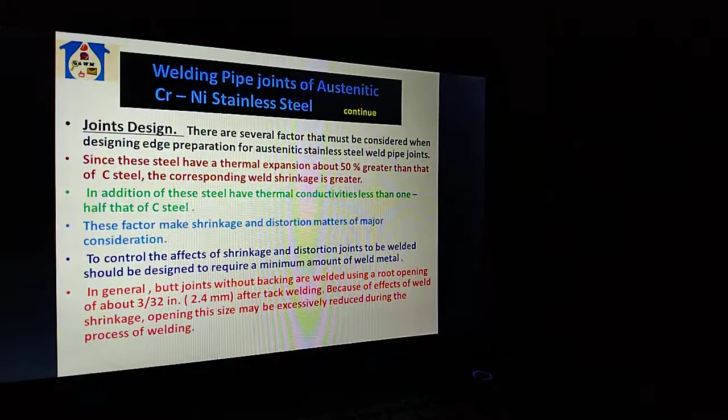Today we are discussing welding piping joint of austenitic chromium nickel stainless steel. Joint design: there are several factors that must be considered when designing edge preparation for austenitic stainless steel weld pipe joints.

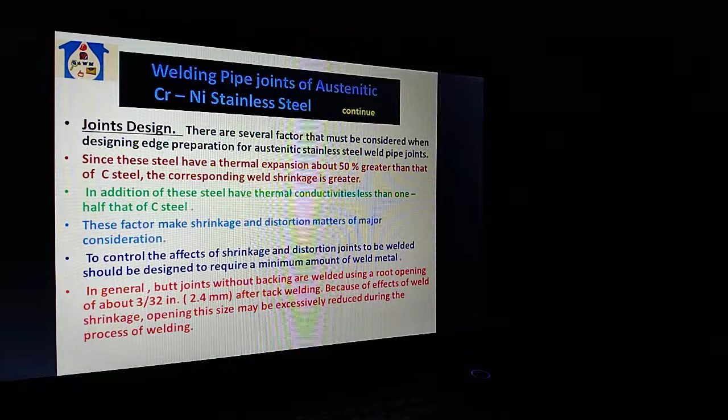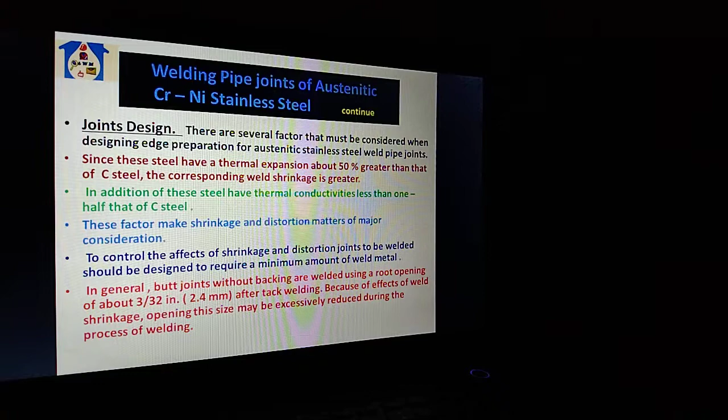Since these steels have a thermal expansion about 50% greater than that of carbon steel, the corresponding weld shrinkage is greater. In addition, these steels have thermal conductivities less than one half that of carbon steel. This factor makes shrinkage and distortion matters of major consideration.

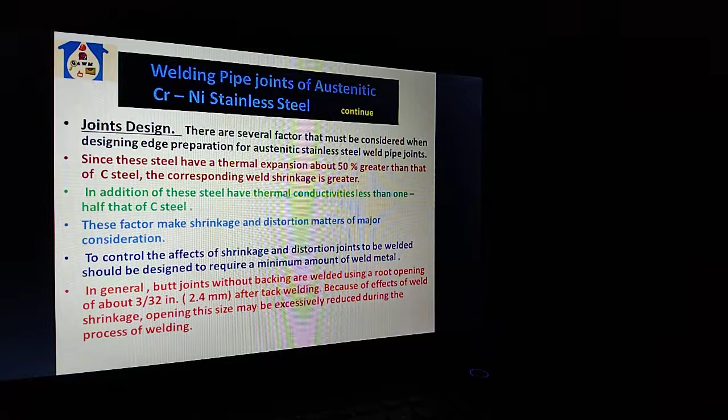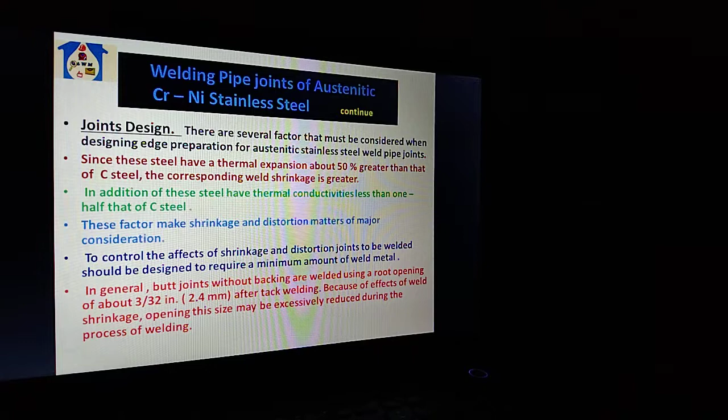To control the effect of shrinkage and distortion, joints to be welded should be designed to require a minimum amount of weld metal. In general, butt joints without backing are welded using a root opening of about 3/32 inch (2.4 mm) after tack welding.

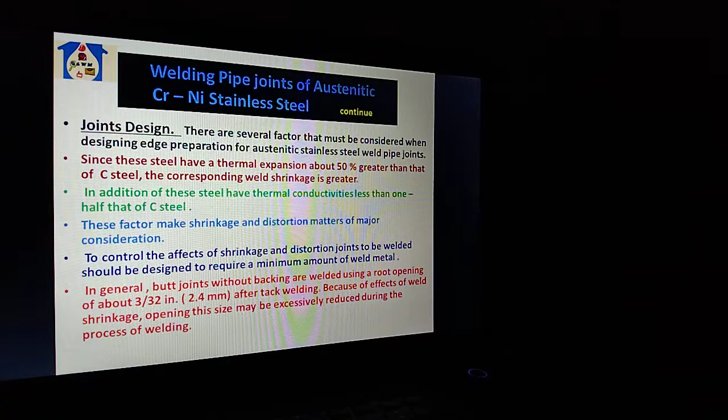Because of the effect of weld shrinkage, an opening of this size may be excessively reduced during the process of welding. This can be prevented by using a wider opening or by in-process grinding.

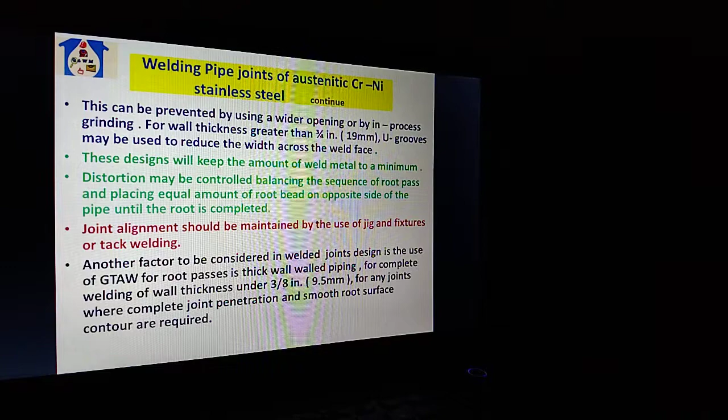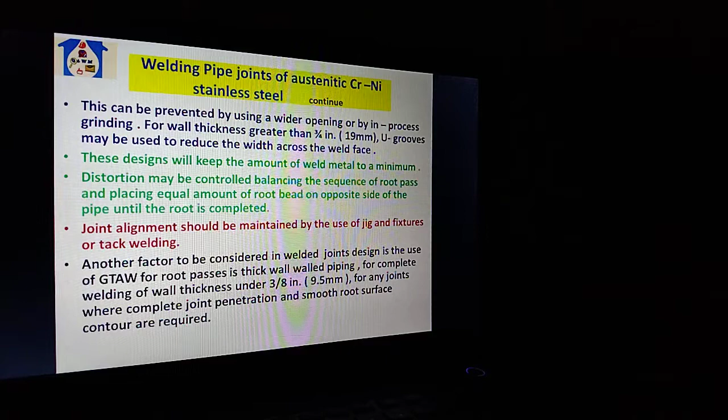For wall thickness greater than 3/4 inch (19 mm), a U-groove may be used to reduce the width across the weld face. This design will keep the amount of weld metal to a minimum.

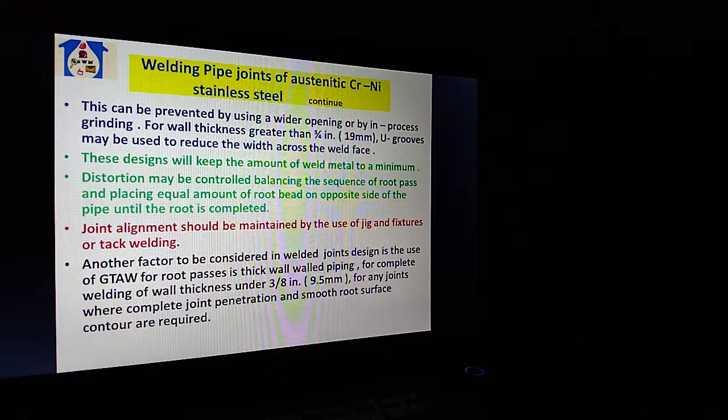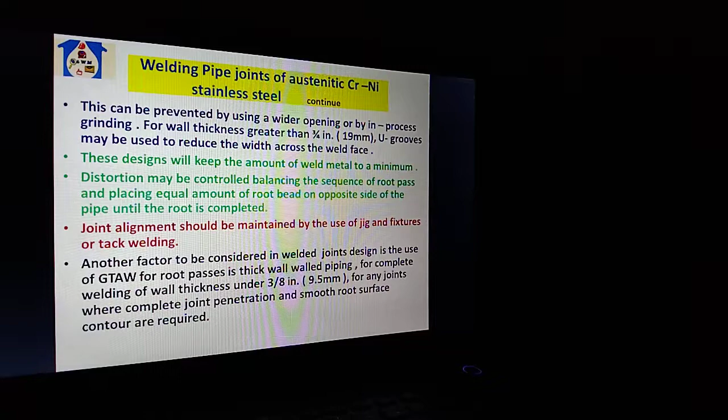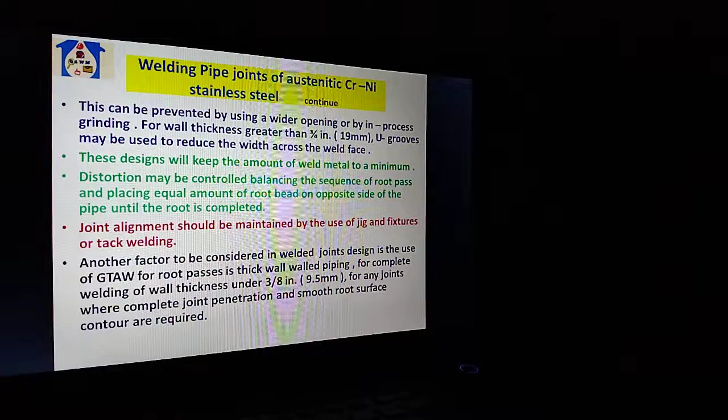Distortion may be controlled by balancing the sequence of root passes and placing equal amounts of root bead on opposite sides of the pipe until the root is completed. Joint alignment should be maintained by the use of jigs, fixtures, or tack welds.

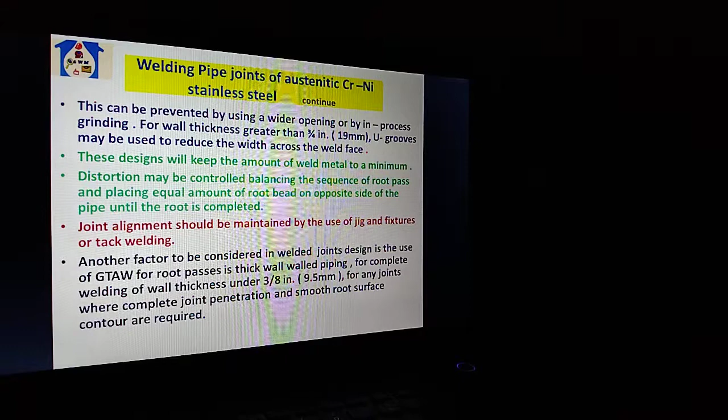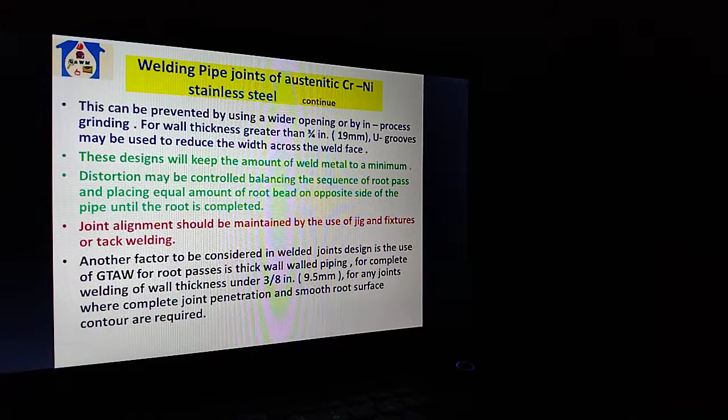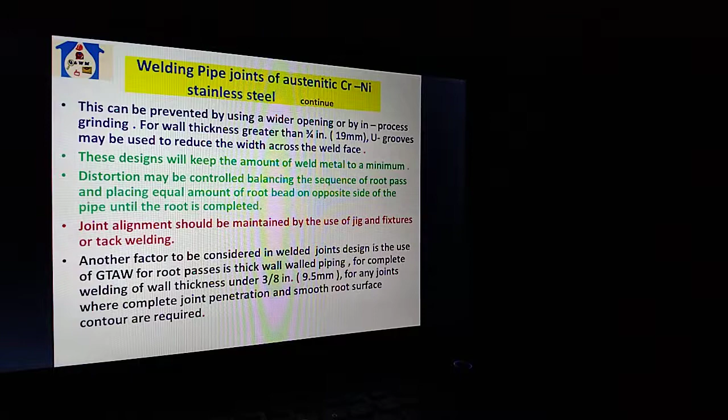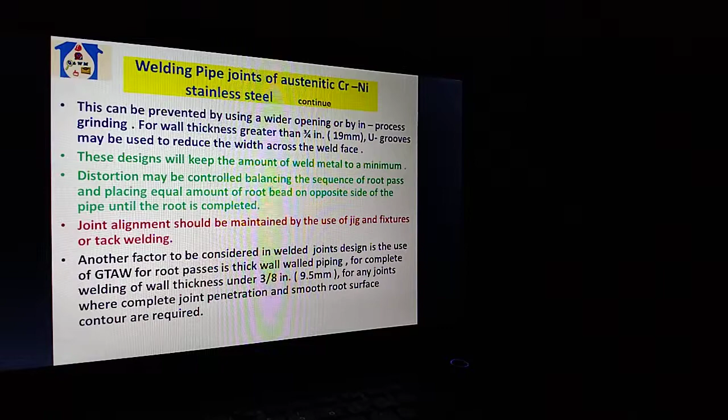Another factor to consider in welded joint design is the use of GTAW for root pass in thick wall piping, for complete welding of wall thickness under 3/8 inch (9.5 mm), for any joint where complete joint penetration and a smooth root surface contour are required.

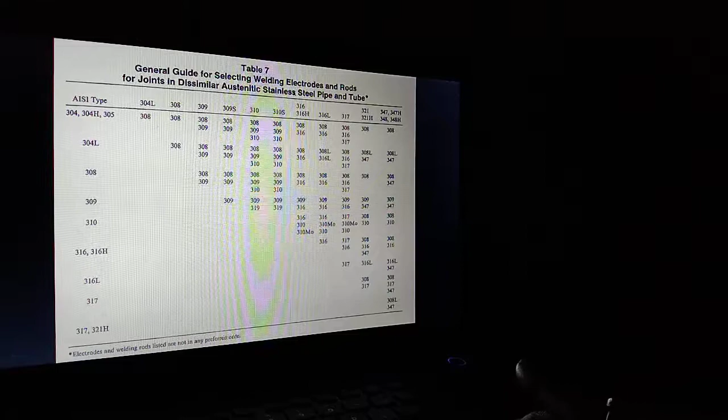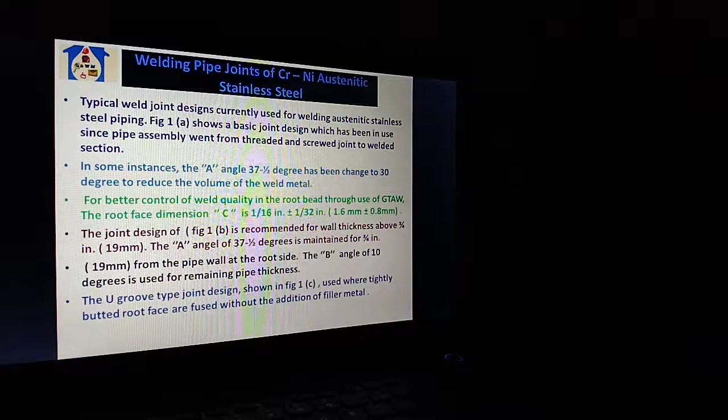General guide for selecting welding electrodes and rods for joints in dissimilar austenitic stainless steel pipe and tube. Typical welding joint designs currently used for welding austenitic stainless steel piping.

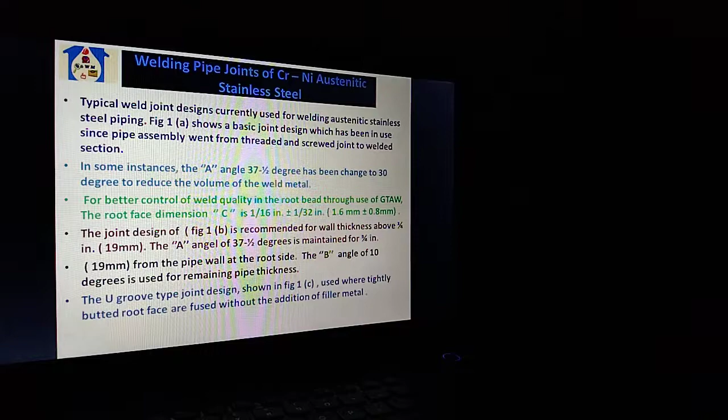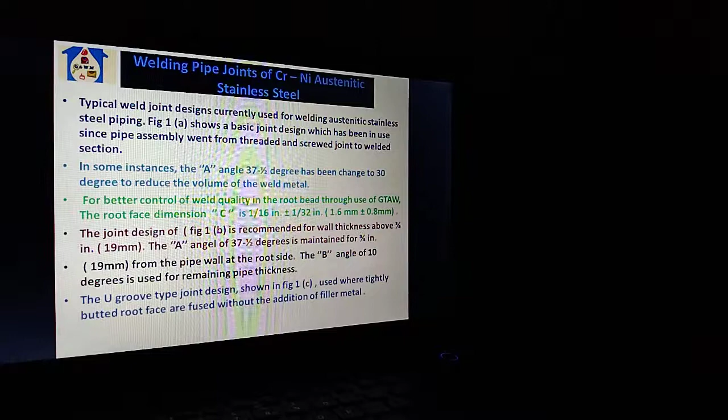Figure 1a shows a basic joint design which has been in use since pipe assembly went from threaded and screwed joints to welded sections. In some instances,

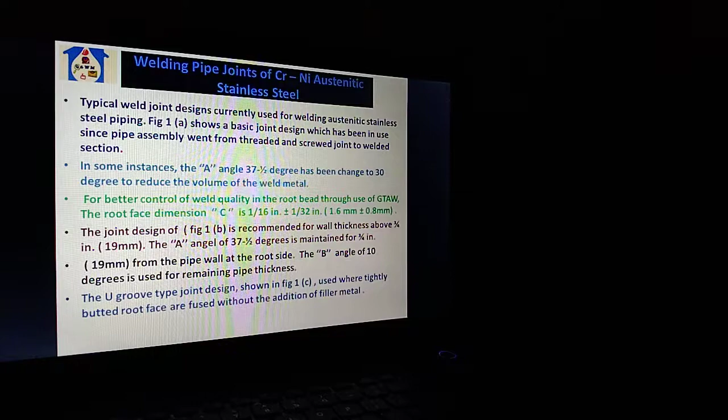the A angle of 37.5 degrees has been changed to 30 degrees to reduce the volume of the weld metal, for better control of weld quality in the root bead through use of GTAW, gas tungsten arc welding.

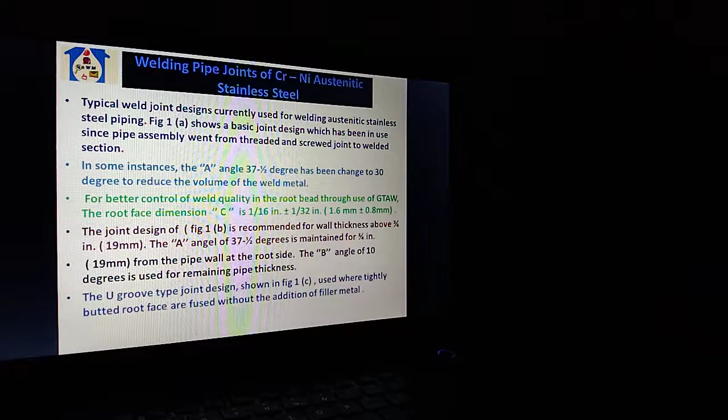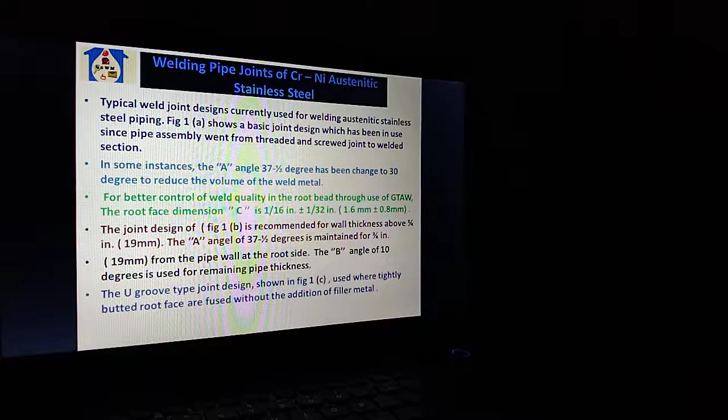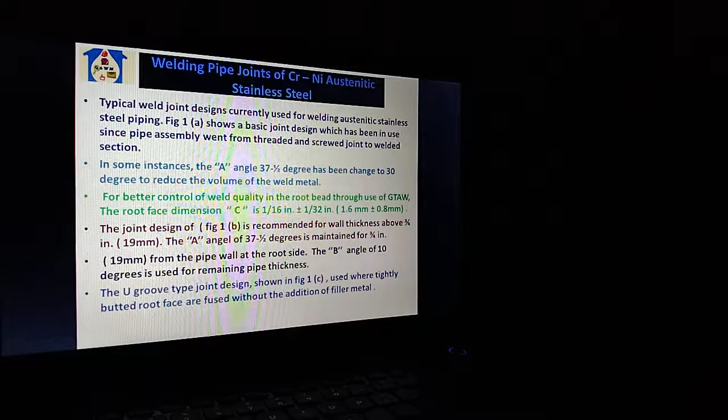The root face dimension C is 1/16 inch plus or minus 1/32 inch. The joint design of figure 1b is recommended for wall thickness above 3/4 inch (19 mm).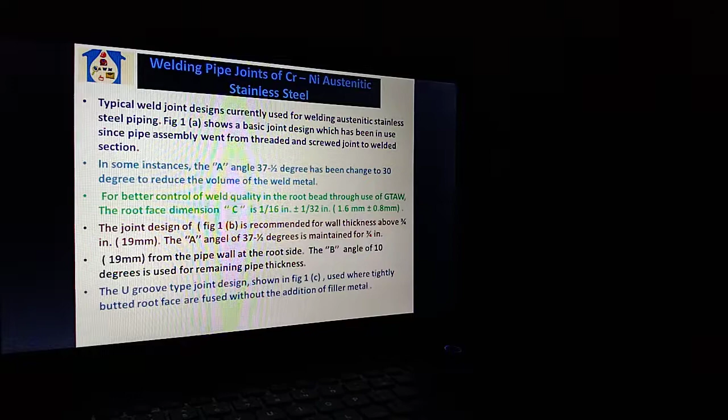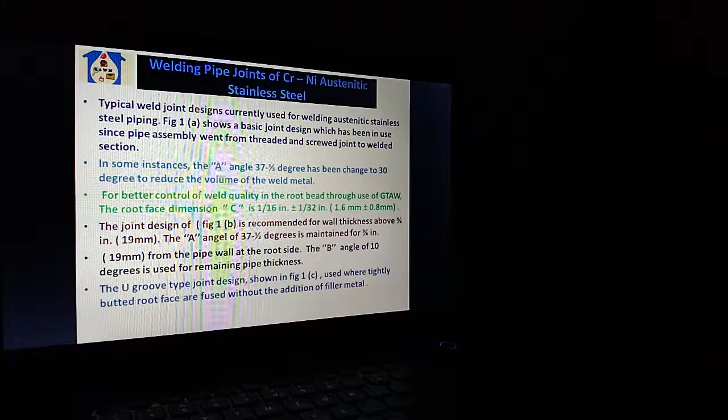The A angle of 37.5 degrees is maintained for 3/4 inch (19 mm) pipe wall. On the root side, the B angle of 10 degrees is used for remaining pipe thickness.

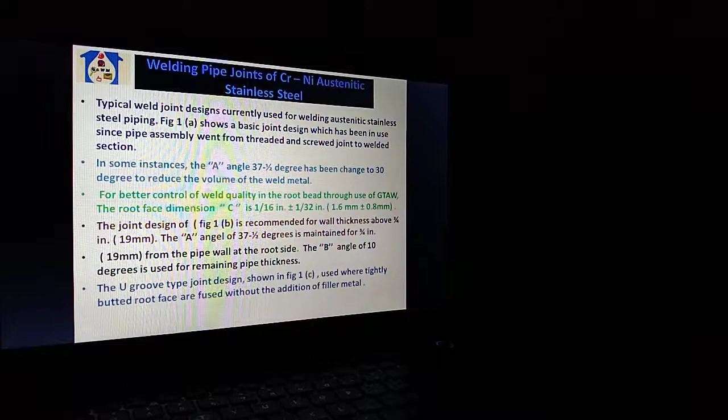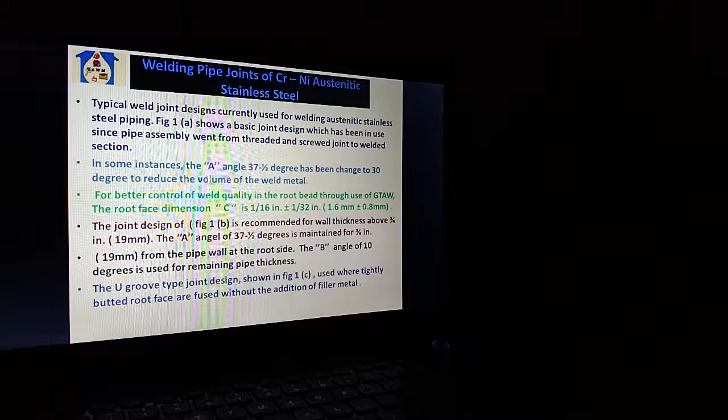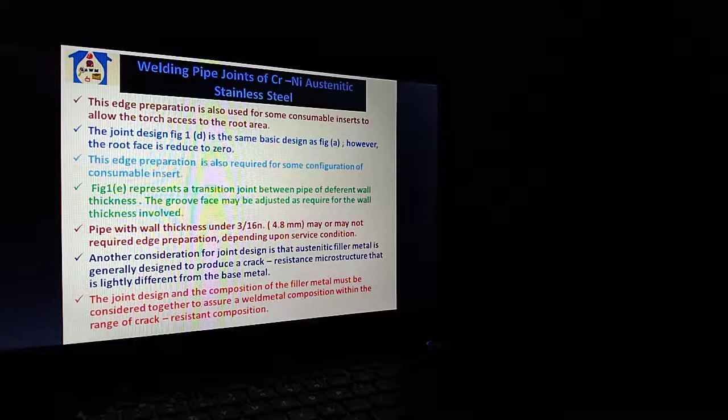The U-groove type joint design shown in figure 1c is used where tightly butted root faces are fused without the addition of filler metal. This preparation is also used for some consumable inserts to allow the torch access to the root area.

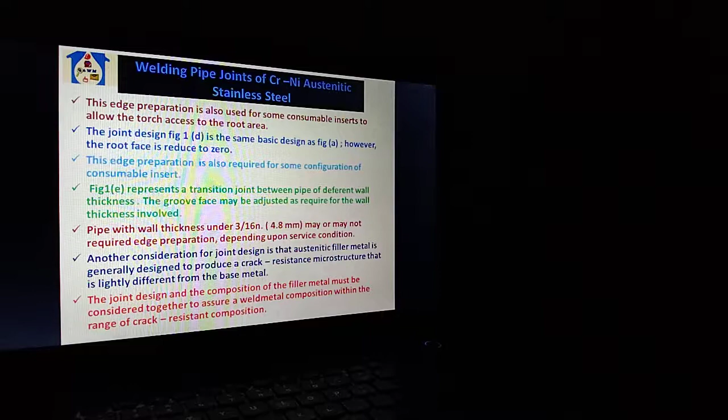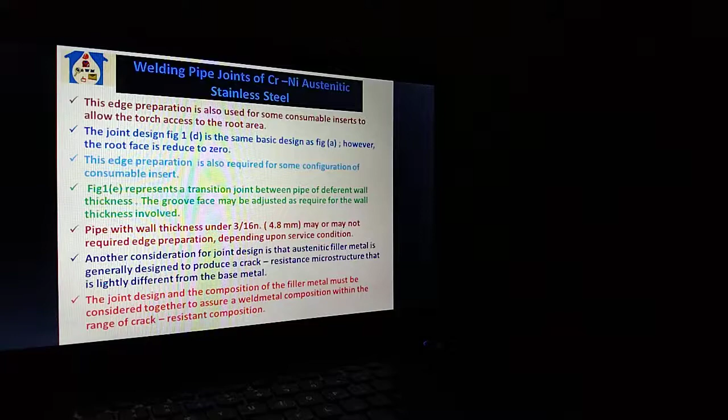The joint design figure 1D is the same basic design as figure A. However, the root face is reduced to zero. This edge preparation is also required for some configurations of consumable inserts.

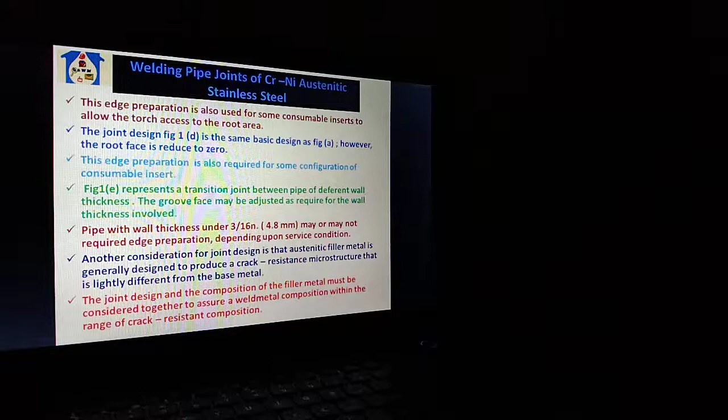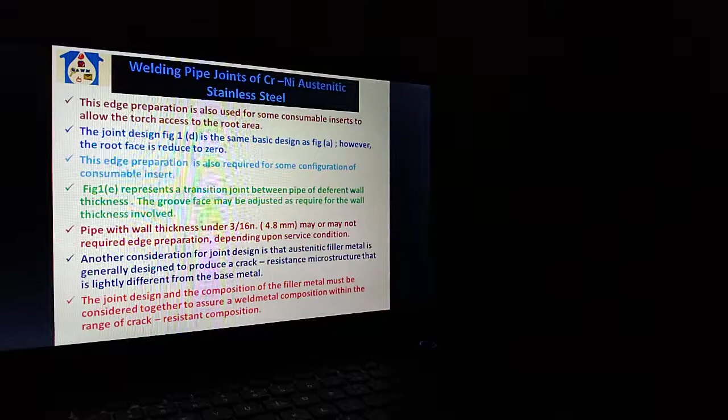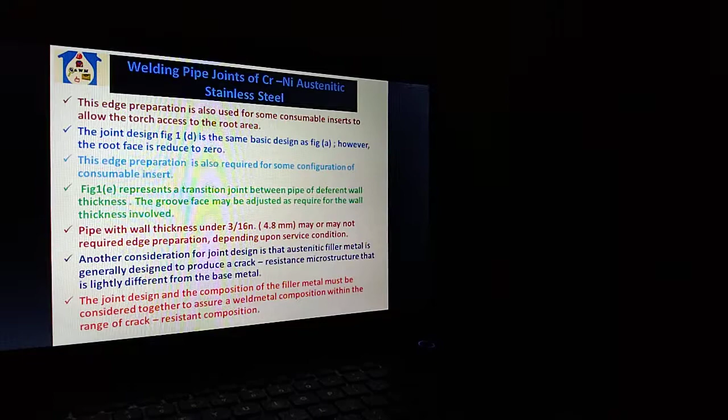Figure 1E represents a transition joint between pipes of different wall thickness. The groove face may be adjusted as required for the wall thickness involved. Pipe with wall thickness under 3/16 inch may or may not require edge preparation depending upon service conditions.

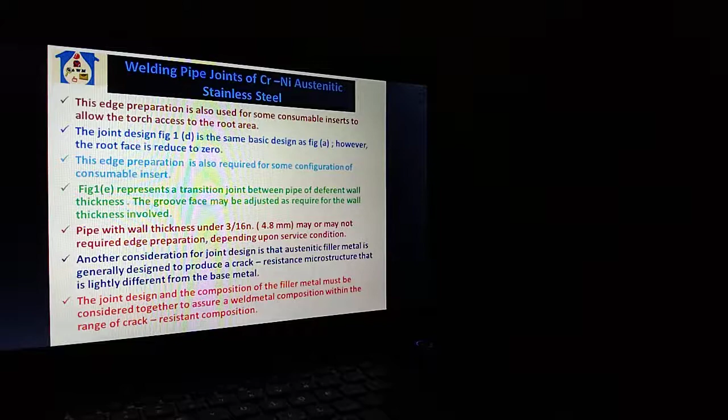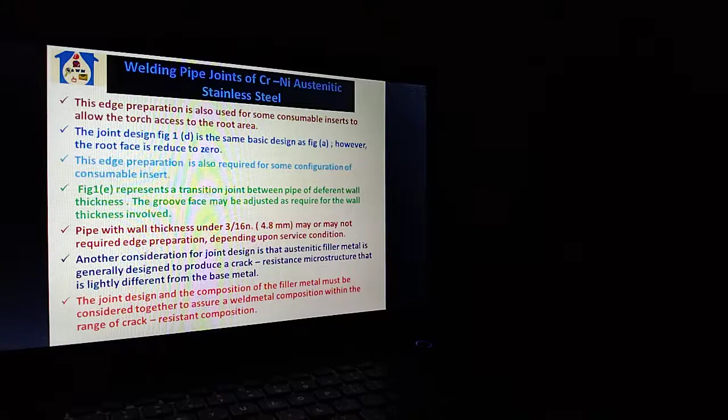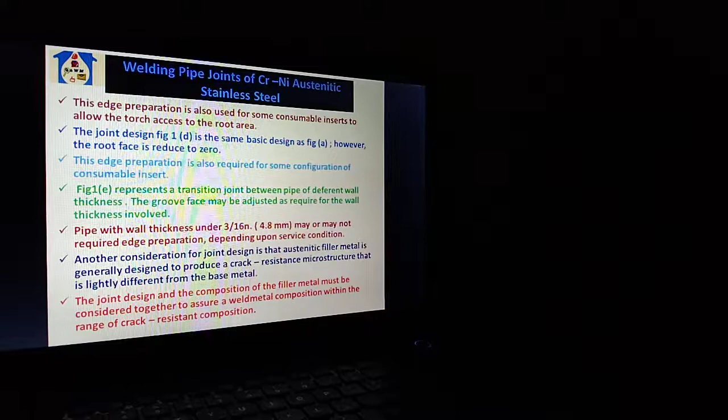Another consideration for joint design is that austenitic filler metal is generally designed to produce a crack-resistant microstructure that is slightly different from the base metal. The joint design and the composition of the filler metal must be considered together to assure the weld metal composition is within the range of crack-resistant composition.

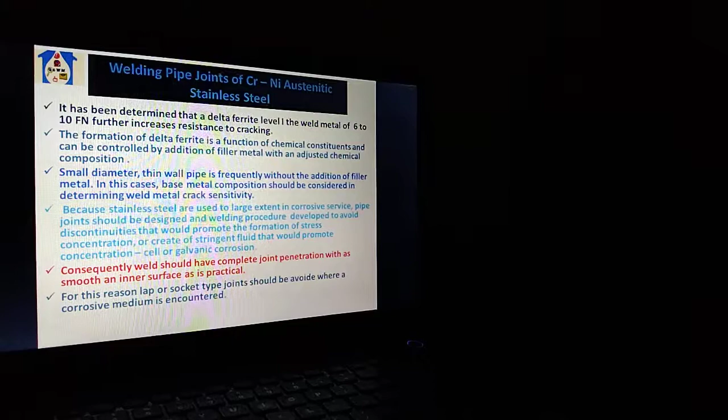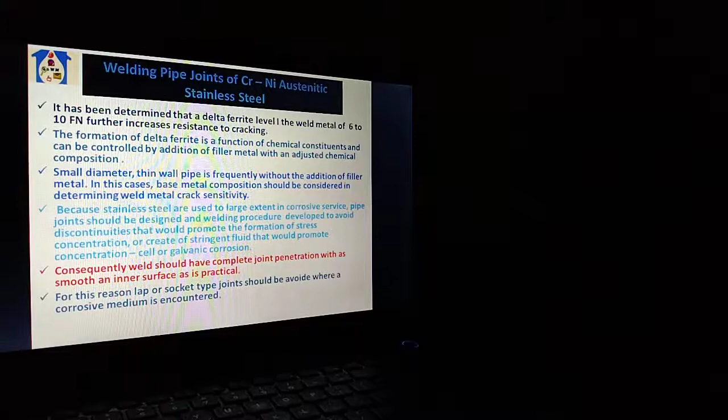Configuration of joints. It has been determined that a delta ferrite level in the weld metal of 6 to 10 FN (ferrite number) further increases resistance to cracking.

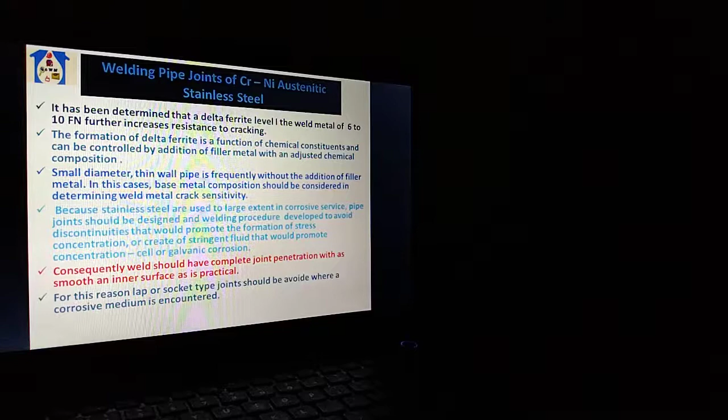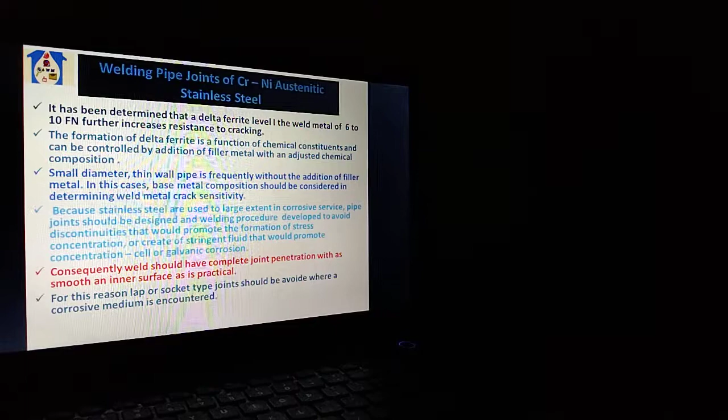The formation of the delta ferrite is a function of chemical constituents and can be controlled by addition of filler metal with an adjusted chemical composition.

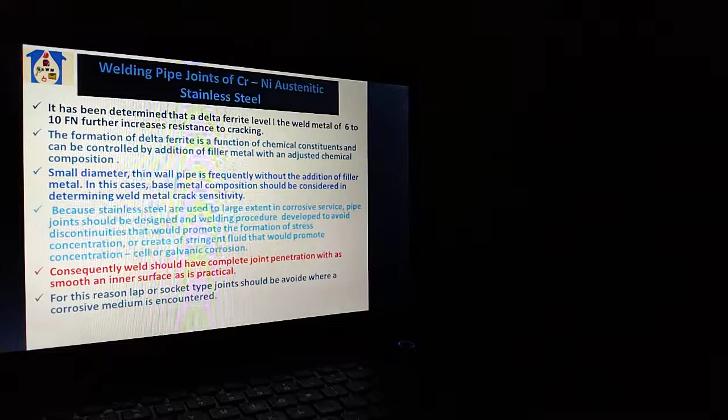Small diameter thin wall pipe is frequently welded without the addition of filler metal. In this case, base metal composition should be considered in determining weld metal crack sensitivity.

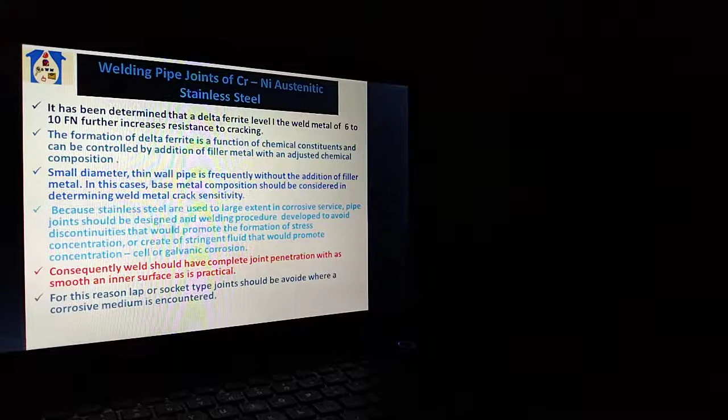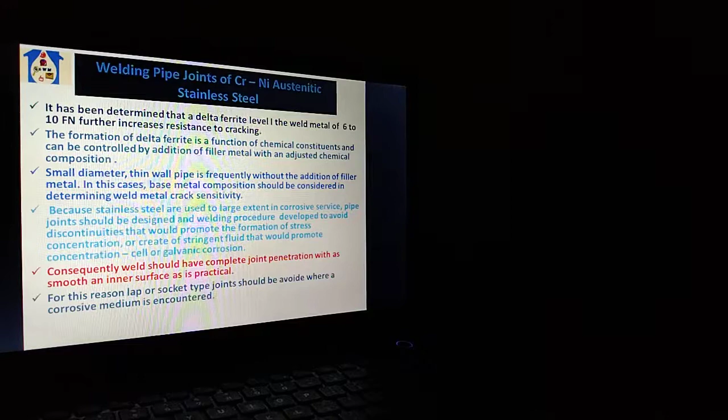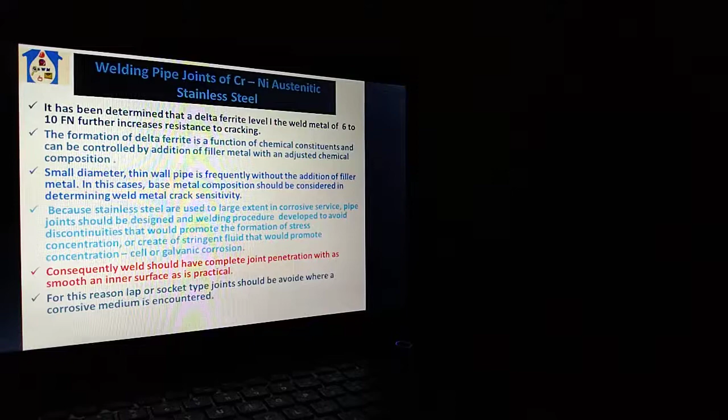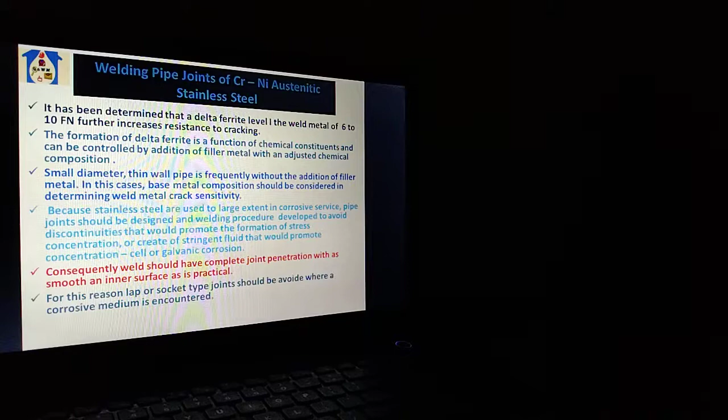Crack sensitivity: because stainless steels are used to a large extent in corrosive service, pipe joints should be designed and welding procedures developed to avoid discontinuities that would promote the formation of stress concentration or create stagnant fluid conditions that would promote concentration cell or galvanic corrosion.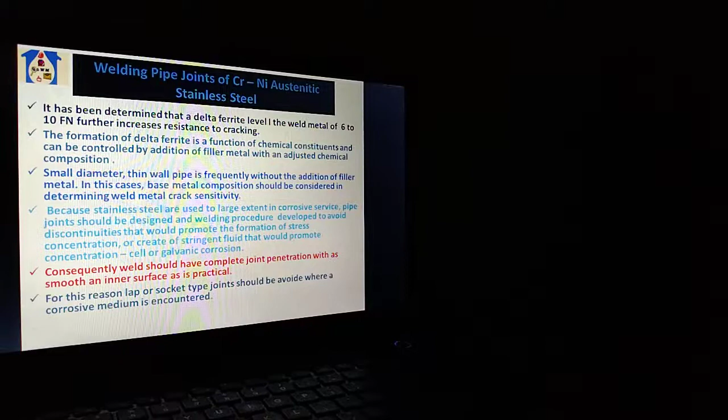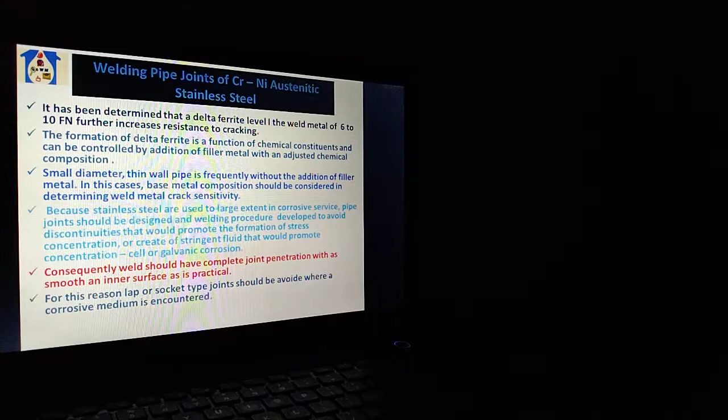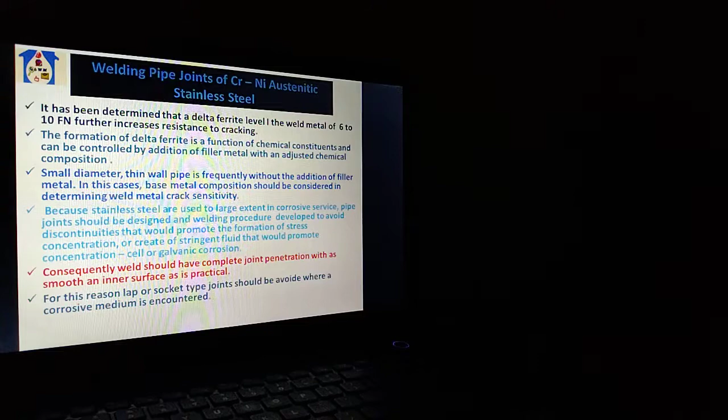Consequently, welds should have complete joint penetration with as smooth an inner surface as is practical. For this reason, lap or socket type joints should be avoided where a corrosive medium is encountered. Thank you.